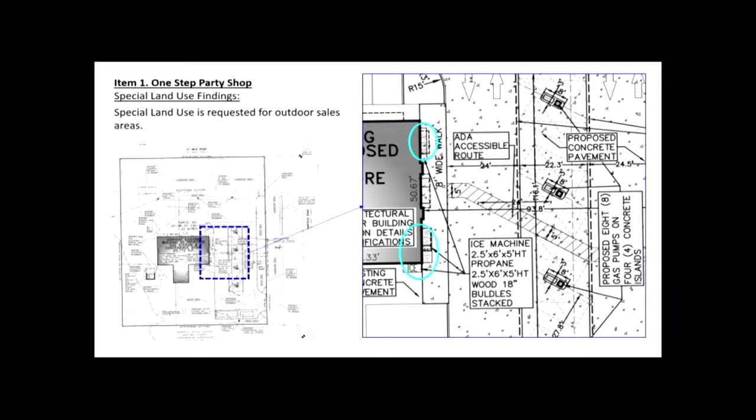So I'm going to walk through first the special land use findings. They are associated with the outdoor sales, things like ice, propane, wood bundles. So what they are seeking is to have those, what you quite often see outside of a gas station or convenience store, kind of on the sidewalk area. The criteria for the special land use, as you're all aware, is that they're in location, size, and character with the development in the surrounding neighborhood. Staff sees with the commercial across the street and the existing commercial plaza that it is already there, that it is in compliance with that, and that it's such a nature that it doesn't affect vehicular or pedestrian traffic. It does not impact those items. That the use shall be designed with respect to location, size, and intensity.

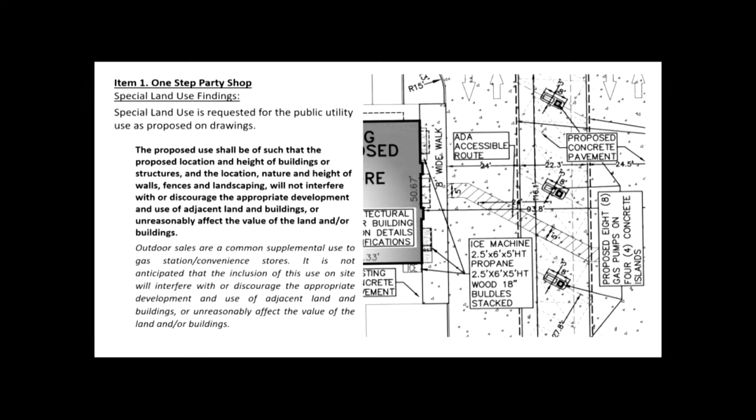So this is pretty standard for a convenience store, gas station. That the proposed location and height of the buildings and structures, the nature and height of the wall and fences -- outdoor sales are a common supplemental use to gas stations. It doesn't really impact the height of the building or anything like that. So we don't anticipate that it's going to interfere or discourage any other development in the area. The proposed use shall relate harmoniously with the physical and economic aspects of adjacent land uses. Again, there's commercial on two other corners at this intersection, as well as there's already commercial at this location. So it is harmonious with that.

Necessary for public convenience at the proposed location -- it's not really an applicable criteria. And that the proposed use is designed, located, and planned to be operated in a manner that public health, safety, and welfare will be protected, and we do feel that that is the case here. And then that the proposed use shall not be detrimental or injurious to the neighborhood. Again, there's a lot of commercial in the area.

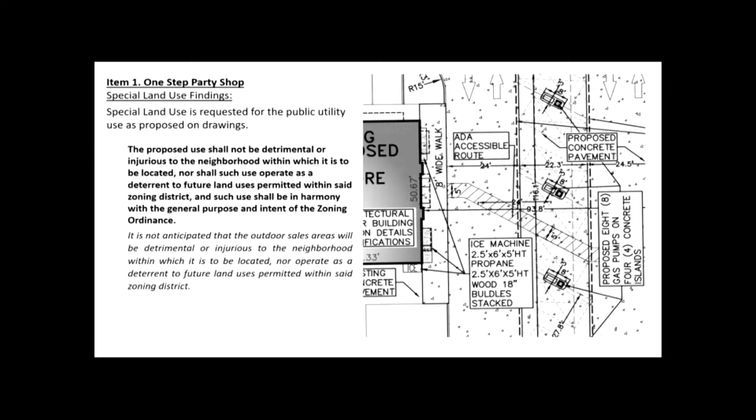There's nothing out of the ordinary with this request for a gas station location, so staff at this time is recommending approval of the special land use portion.

With regards to the site plan, they did come in for a couple variances, one of which was some setback reductions. That request was denied, so they are proposing to remove a portion of the building and fit the gas pumps on what would be the east side of the building along Garfield. They are meeting all the minimum setbacks.

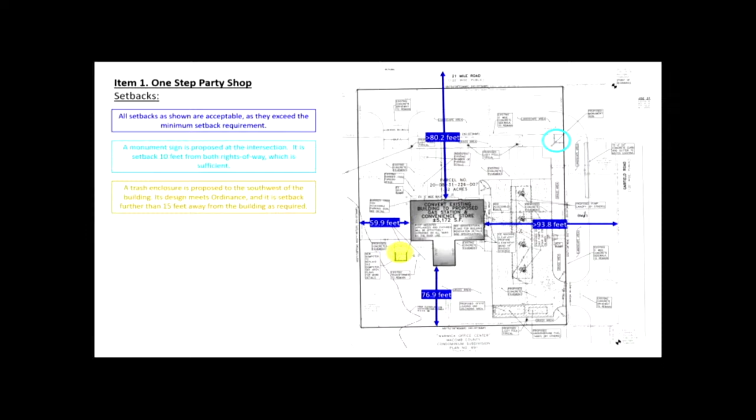They do propose a monument sign that meets the ordinance, and the trash enclosure that meets the ordinance as well. They have 5-foot sidewalks along Garfield and 21 Mile, and they are showing that as well as the 2 access drives.

To note, the southern access drive on Garfield is 29.6 feet when 30 feet is required. That was a variance that they got granted, so that is in accordance with their granted variance.

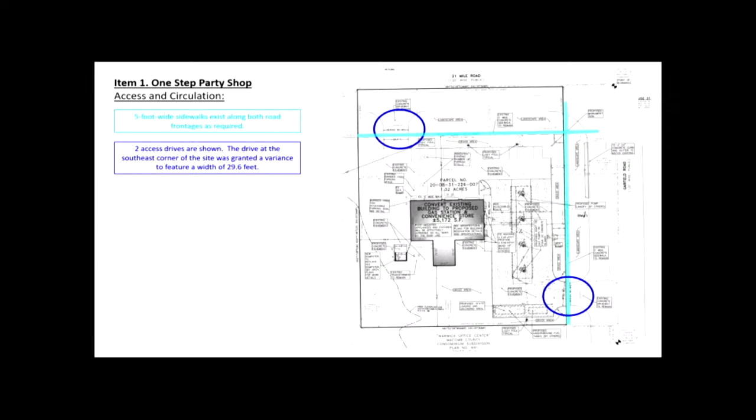They have 17 parking spaces required as well as 8 pump spaces, and they're providing 24 spaces and 8 pump spaces as well.

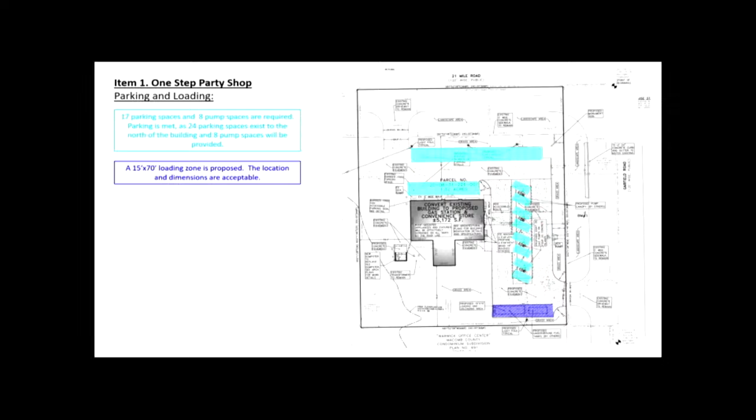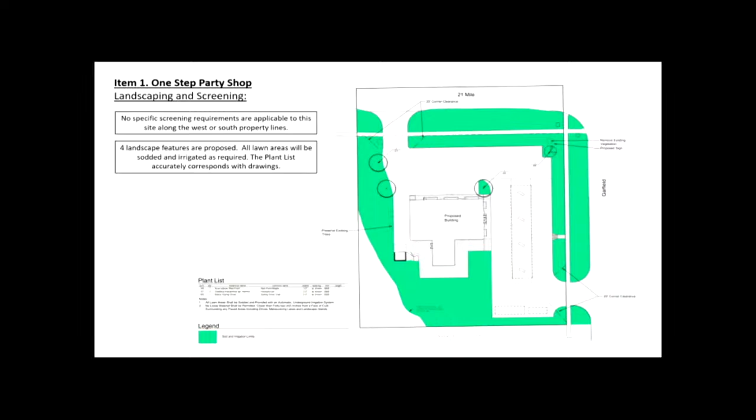They also provided the photometric plan showing where the lights would be. They're all angled down and shielded as required by ordinance. At this time, staff is recommending approval of this site plan along with the special land use.

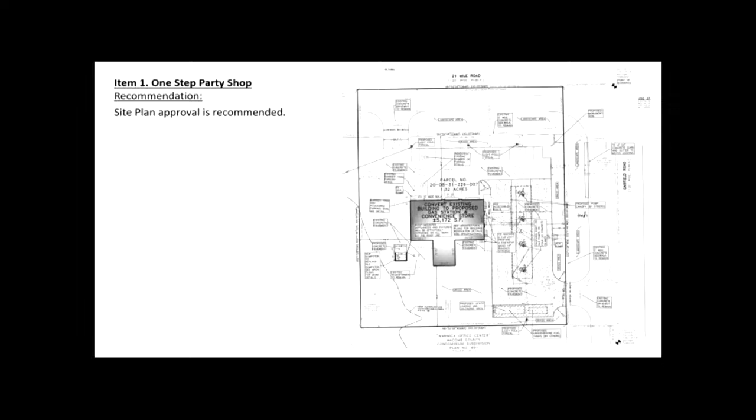All right, thank you, Mr. Box. Is there any questions for Mr. Box from the board? Go ahead, Mr. Spatafora. Yes, Mr. Box, the elevations that were included in our packet, they look like they're switched around or reversed, where the east elevation looks like it's west and north is south.

Can we take a look at the drawings, the elevations of the buildings? It looks like on sheet A20, where it says the south being the front elevation, given the space and the past variances and the parking there, that looks like that's the north. And what is proposed to be the west as the left elevation, that looks to be the east. I would think that is what would be facing the gas pumps.

I think you're correct, I think they're reversed. Okay, so where the east should be on the west side towards the drain, and what's labeled north should actually be south, and what's labeled south as the back is actually the north, and the south front is actually the north. Yep.

And are you and staff comfortable with the variances and the revisions that were made as far as the pumps being a safe distance away from Garfield Road? Yes, they meet the ordinance. The reduction in the setback for the pumps previously was denied, so what they're providing tonight does meet the ordinance. Okay, all right, thank you.

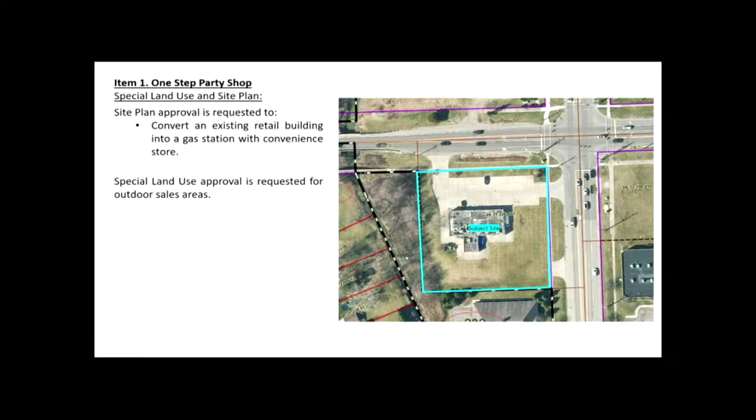If I can go back to the right slide here. So you can see this office complex actually owns all that drain easement. So they don't actually touch - the ordinance requirement for a wall is when you abut residential. They don't abut residential. I see, they're surrounded by the office. Thank you for the clarification. I appreciate it.

Any other questions or discussion? Hearing none, are there any motions?

Mr. Chairman, I will go ahead and make the motion. We'll start with the special land use, since that was presented first. I'll make a motion to approve the special land use for One Step Party Shop on the southwest corner of 21 Mile Road and Garfield Road in section 31, permanent parcel number 08-31-226-007, pursuant to the recommendation of our planning department, the department's reviews, the discussion here at the planning commission table, and as presented, further input from the petitioner and representatives.

Very good. Motion by Mr. Spatafora. Is there support? Yeah, I'll support. Supported by Mr. Meyerly. Mr. Bentley, actually, I should check - any discussion on the motion? Seeing no discussion, Mr. Tuckfield, if I could.

Go ahead, I Mr. Box just want to get this on the record before any votes. You all have at your seat a letter - I was going to mention this before we went to the next one. I just want to make sure these individuals are aware of this. You have been provided a letter from Kevin and Chris King.

Yeah, and we'll mention that also. I'll mention it briefly in a second. I was thinking that as well as we were going into it.

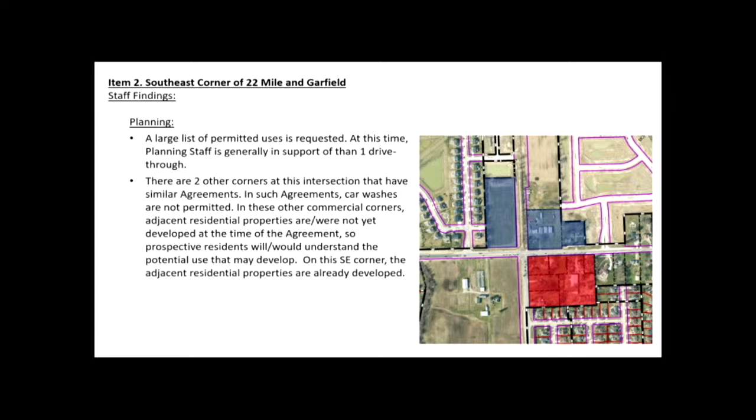So that being said here, in general, I think staff is in support of this conditional rezoning agreement, but we would ask the Planning Commission to consider how many drive-through uses is appropriate, as well as one of the items on the list is for a car wash. It's a little bit noisier, and both of the two, the other two corners at this intersection would not allow a car wash, where this one, if this agreement were approved, would. But again, in general, I think staff is in support of this agreement. We just ask that you consider those two items.

All right, thank you, Mr. Box. I will make sure that I hold with our Planning Commission standard for comments and ask if the petitioner is in the audience. If you are, please come forward to our podium over here. Give your name and address and any comments you might have. And it's possible, if you would prefer, that might be able to be lowered to a seated height. I don't know if you need it, but we can adjust that if it's necessary.

It's fine. Bob Kirk, 19500 Hall Road, Clinton Township, Michigan. With me is Louis Ciotti from Landmark Real Estate. A little unique here, and what we're asking for is a rezoning without any uses. The purpose is we're trying to assemble these properties. If they were to be developed singly, we'd have some real problems with regard to traffic circulation, access. The properties are zoned AG, which has traditionally been the township's placeholder until things develop. In this case, Garfield Road has come through. Our request is consistent with the master plan. And as I said, the assemblage of the property and the zoning allows us to properly develop the sites. It would allow for better circulation internally, access off of 22 and off of Garfield.

With regard to Josh's comment on drive-throughs, we've eliminated a lot of the objectionable type uses, banquet halls, auto service centers. But with 6 acres, we think that's plenty to sustain 2 drive-throughs. I think if you developed it separately, you'd be able to get more than 2. So we are requesting 2. The uses we requested mirror the properties on the north, so I think this is a good opportunity for the township to try to make a consistent corner here with all uses being fairly similar. That's all I have. All right, very good. Any questions from the board?

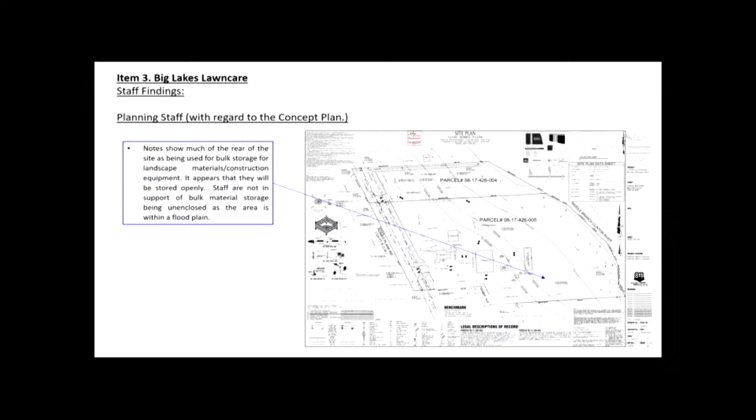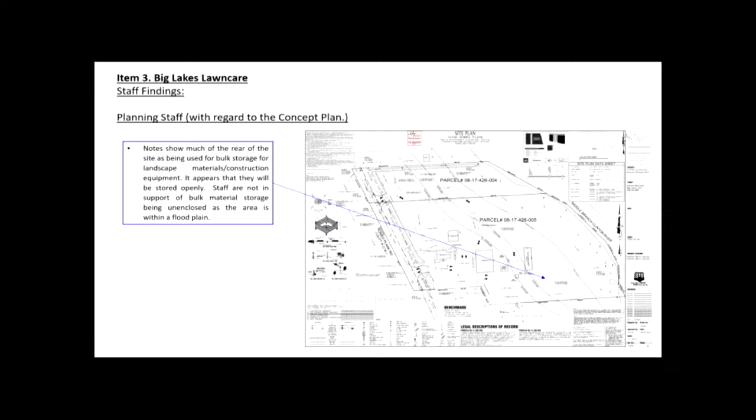Notes show that much of the rear of the site is being used for bulk storage for landscape materials and construction equipment. It appears they will be stored openly. Staff is not in support of this bulk material storage being unenclosed, as the area is within the floodplain.

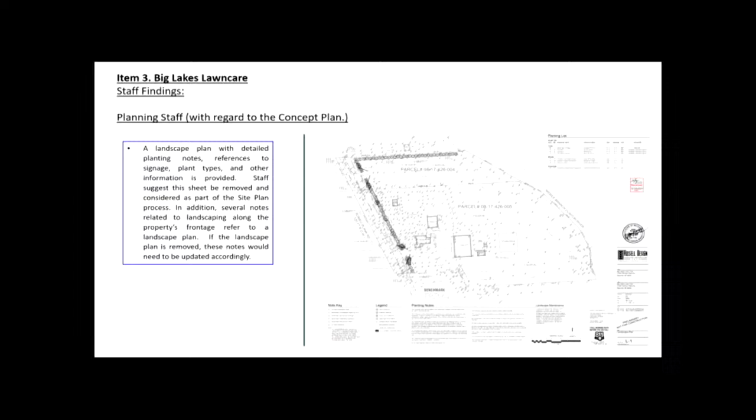A landscape plan with detailed planting notes, references to signage, plant types, and other information is provided. Staff suggests the sheet be removed and considered as part of the site plan. In addition, several notes related to landscaping along the property's frontage refer to a landscape plan. If the landscape plan is removed, these notes would need to be updated accordingly.

So it was quite a list. That being said, staff is not in support at this time of the proposed amendment. There's a lot of ambiguous language and too many conditions that seem to stray from what was initially promised of Wade's Nursery versus what we're seeing out there today.